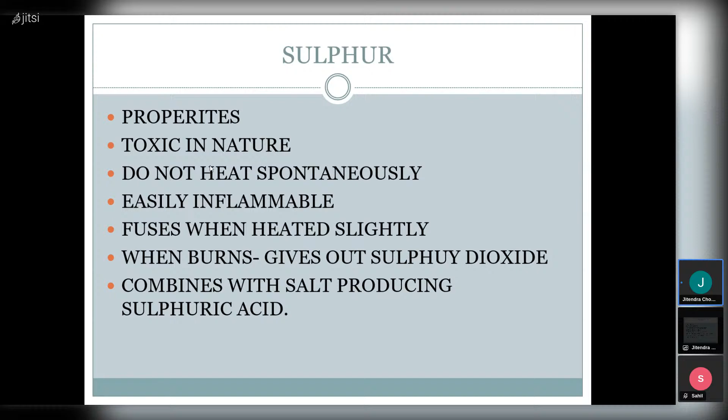Then it fuses when heated slightly. So if there is a very slight fire, then because of the dust and all, it will subside fast. If it burns, it gives out sulfur dioxide, which combines with water to produce sulfuric acid, H2SO4, and that is very corrosive. So what are the hazards? The main hazards are, first of course fire, then corrosion, then dust explosion.

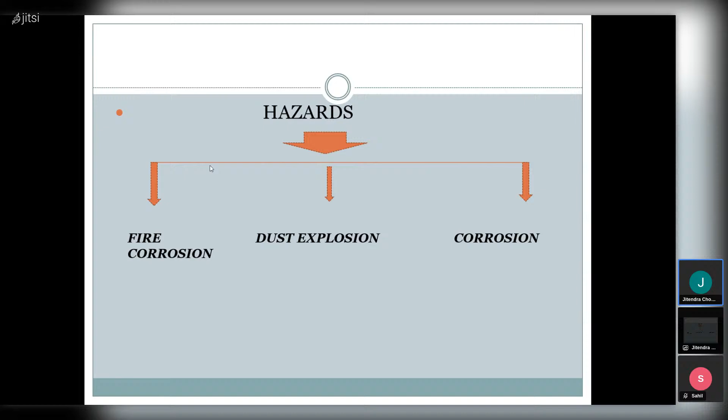So how do we take precautions for loading sulfur? The first hazard is fire hazard. To avoid that, we should have no loose metal objects in the hold, or on the deck also if possible. Bilge covers and all should be properly lashed and secured. All other lashing gear, cranes, everything should be lashed. Inside the hold there should be nothing left which can cause a spark during rolling, pitching, vibrations. During discharging, the grab could strike against it and produce a spark.

So the grabs have to be used very cautiously and slowly. Freshwater hoses are to be rigged on deck. If fire occurs, a fine spray of fresh water may be used, or more sulfur shoveled onto the burning area to smother it.

Okay, so if there is a small fire on the heap of sulfur, normally, like we told before, you can spray a little bit of fresh water. And if the fire is large, close the hatch or hatch entrance, then you can use CO2. Most bulk carriers have a fixed CO2 system with lines connected inside the holds. In case of fire, you can use that. If you remember, you were asking this question: there is fire, you have fixed CO2, but we use it last.

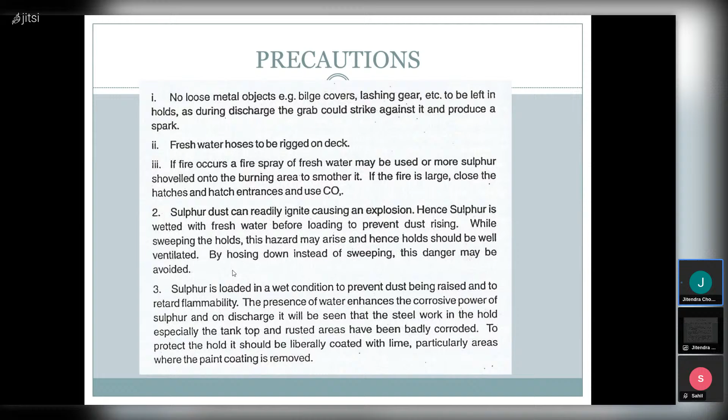Then the hold should be thoroughly cleaned. After that, all material like rags and pieces of wood should be removed. No loose metal objects to be left in the hold. Bilges to be tested and covered with limber boards.

Any chinks should be caulked to prevent dust from finding its way into the bilges. Okay. Holds to be lime washed prior to loading, as we just discussed. CO2 system has to be tried out for emergency.

And when you are discharging, holds should be thoroughly cleaned with particular attention to be paid to the underside of hatches, because it's a dusty cargo. So corners, underside, these are the areas which you forget, which should be cleaned properly. Box beams, ledges.

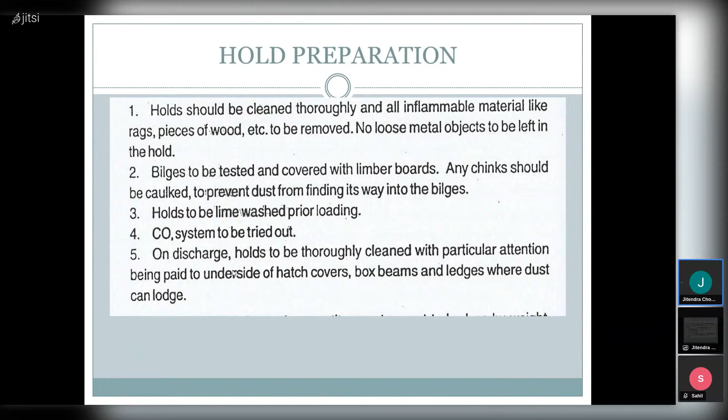And when the sulfur is loaded wet, the quantity may turn out to be less by weight, because with the wet cargo, some cargo will go inside the bilges. So there will be some less cargo. Bills of lading should be suitably claused to prevent claims being made.

So when there is a bill of lading, which is showing the contract, who is the owner of the cargo, who is the shipper, and all. It's like a receipt agreement of the cargo between shipper and receiver. So the rules should be made clear, who will be responsible if the quantity is less due to genuine reasons like lime washing or wet sulfur or something.

So let's see one case study: there was one ship which capsized, MV Arcadia Pride in Mumbai anchorage. It was in 1997, and the ship was anchored in Mumbai harbor with a cargo of granular sulfur from West Africa during the monsoon. Sorry, it was loaded from West Africa, and they were anchored in Mumbai harbor, maybe to discharge. On one particular day, the swell was very high and the cargo shifted, and she capsized with the loss of several lives, ship, and cargo.

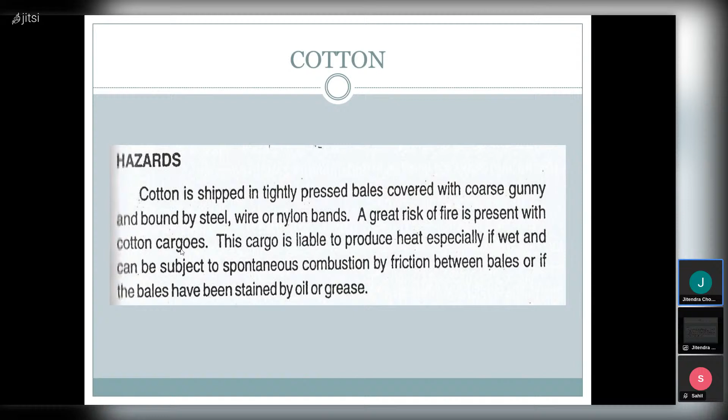And friction can also cause fire with too much moving. So to avoid all these things, especially when loading, what we must do first: the hold should be properly cleaned, dry, well aired, and absolutely free of oil or grease. Cotton must not be stored in freshly painted holds, as heat produced is likely to cause ignition of paint vapors.

Okay. Firefighting equipment must be tested and ready for immediate use, and all the precautions observed. So, all firefighting equipment should be tested and ready.

If using steam to fight a fire, the decks should not be cooled, as this causes the steam to condense, creating a vacuum inside the hold, which draws air into the hold, thus assisting the spread of the fire instead of containing it.

So, like we were discussing, if there is a fire, sometimes instead of water, if you have extra, you can put steam also. But you can use one thing, either cooling down by spraying or steam. If you use both, then there can be a vacuum inside the hold which draws air in, and this air has oxygen and it can increase the fire.

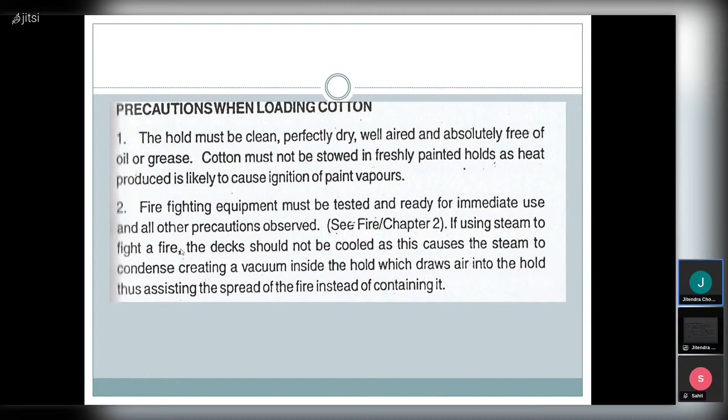So the cotton is loaded in bales, so it should be clean and absolutely dry, obviously, otherwise it will contaminate, free from any rust, stains, grease, oil. If it is in a confined space, it will heat and deteriorate. Wet and dry bales should not be stored together. Wetness may not be readily apparent as the outside of the bales may get dried quickly.

So if there are wet bales stored in a confined space, obviously, because of the small space, the heat will increase. Because cotton, whatever form it is, is from the live plant and it still has some prana energy or life. It deteriorates over a period of time if it is left without any use. So better use it, or keep it safe on the ship.

Loosely packed bales or those with broken bands or torn wrapping should be rejected, as these permit air circulation and catch fire easily. So you have to inspect the bales very carefully for any damage. Make sure that everything is properly lashed and wrapped, and there are no broken bands, no broken bags.

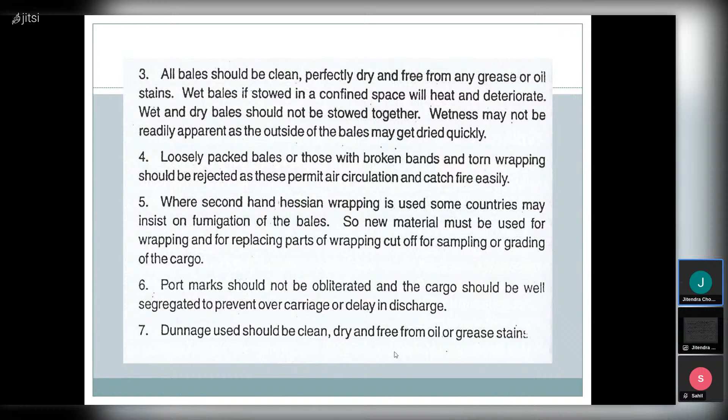All precautions taken, crew is trained and aware of everything. Dunnage used should be clean, dry, and free from oil and grease, obviously. So try to protect it from oil as much as possible.

Then, the latest in the IMSBC code, there is also a cargo called coal, which is loaded on bulk carriers, general cargo and other types. So there is an MS notice, around 12th or something, and this notice and one more chapter from the Code of Safe Practice for Solid Bulk Cargoes and the M notices.

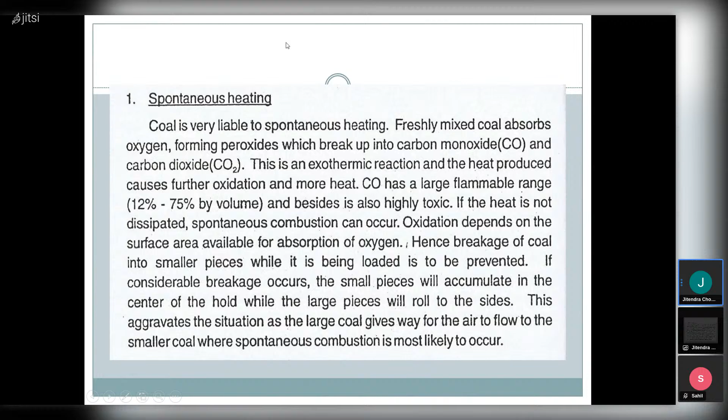So carbon monoxide has a large flammable range, between 12 to 75, I think the biggest flammable range, and besides it's also highly toxic. If the heat is not dissipated, spontaneous combustion can occur. Oxidation depends on the surface area available for absorption of oxygen. Hence, breakage of coal into smaller pieces while it is being loaded is to be prevented. If considerable breakage occurs, the small pieces will accumulate in the center of the hold while the large pieces will roll out to the sides. This aggravates the situation as the large coal gives way for the air to flow to the smaller coal, where spontaneous combustion is most likely. Okay, so you have to make sure you inspect all the cargo nicely, damaged or non-damaged.

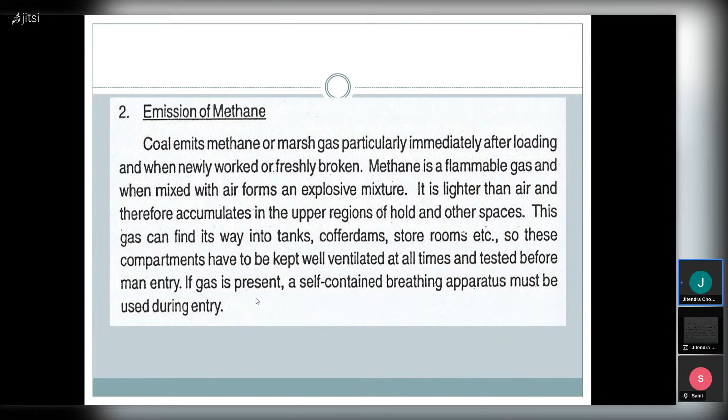Then, as I told you, there is methane also. Methane is the natural marsh gas, and it is also flammable. It can cause fire. Because methane is lighter than air, it will be above in the hold, and if the spark is also up, the chances of fire are very much increased with the presence of methane, and it can go into the side tanks, cofferdams, storerooms, everywhere. And you have to make sure you can start ventilation, and test it before man entry. So obviously we test all the gases before man entry: hydrocarbon, CO2, H2S, and oxygen. And if any gas is present, then take precautions to ventilate, clean, and then check again.

Then there are different types of coal as we discussed. One is pond coal, where it is left over for a long time in mining or somewhere, and fresh water is being sprinkled. Later it is reclaimed for shipment. And there's a very high moisture content and very high sulfur content also. This type of coal gives rise to a high temperature from self-heating, and in the presence of moisture and sulfur leads to the release of sulfuric acid, resulting in corrosion of the ship's holds. The ship should carry instruments for measuring the pH value of bilges, and this must be done regularly.

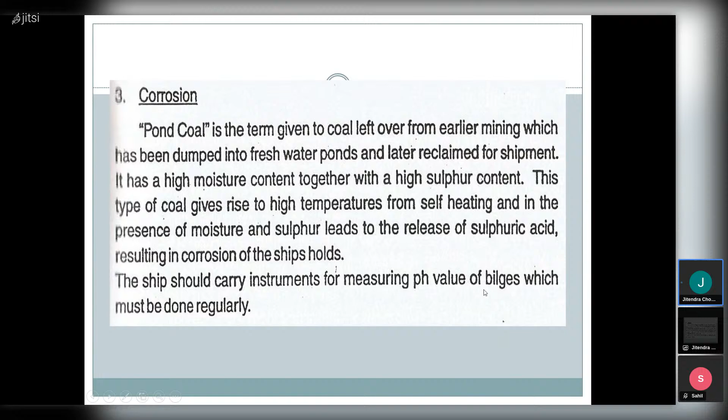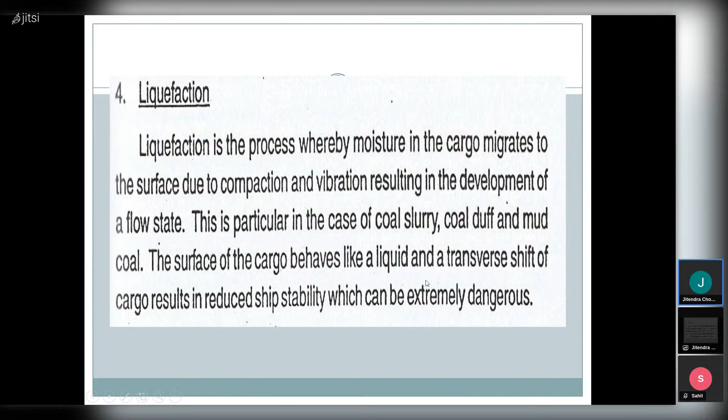This is particular in the case of coal slurry, coal duff, and mud coal. The surface of the cargo behaves like a liquid, and a transverse shift of cargo results in reduced ship stability, which can be extremely dangerous. So you can see because of liquefaction, many vessels sank. The last one also was because of

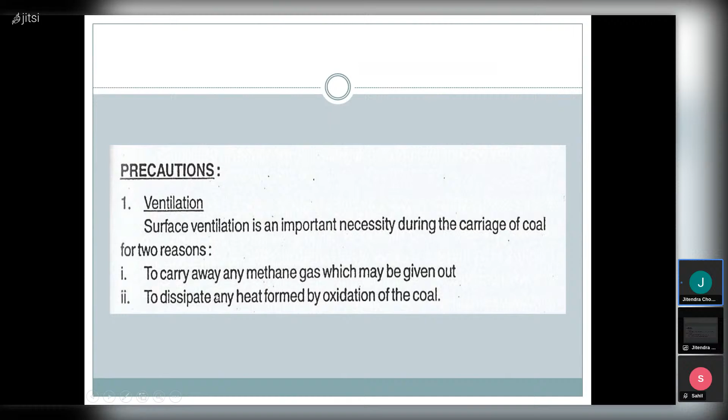So whatever cargo is there, whatever solid, dust, liquid, corrosive cargo, we have to go in the place and start trying these practicals. So now it is showing practical also, and otherwise also you have practicals. 'Tween deck and lower hold ventilators should be independent, obviously. Should have independent routine. Then before discharge, careful ventilation should be directed towards removing the gases both from between deck and lower hold.

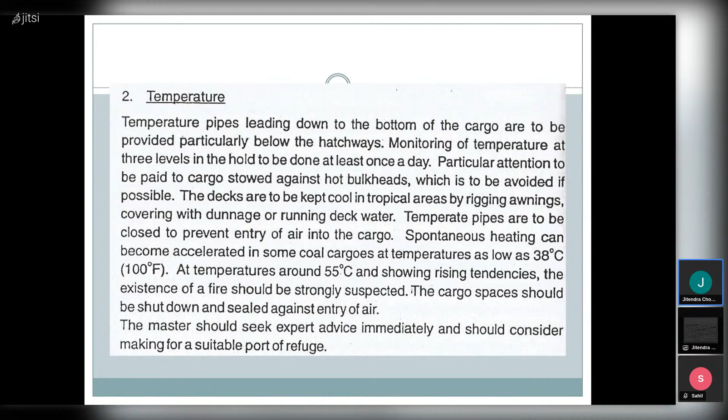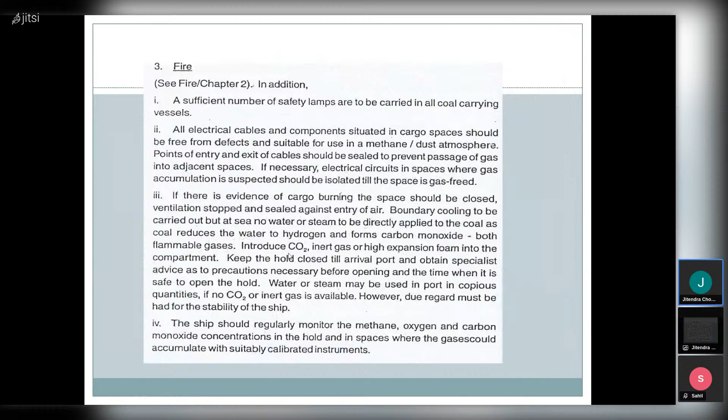Now the main thing is shifting of the cargo. So this we will continue from tomorrow. Any questions?